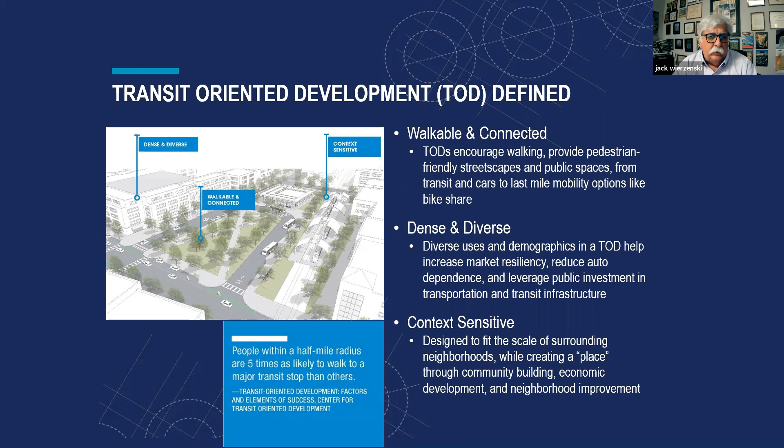Next slide. The thing that was done at the same time as this TOD guidelines update, and what's held up the TOD guidelines update, was also an update of the TOD policy. That had been done last in 2015. We had a lot of new issues and ideas pop up, and our board asked to update that. So what we did is midway through the process of updating the guidelines, we updated the TOD policy.

One of the things we really wrestled with, important to all of our cities, was that as we went through the update we realized all the cities have different goals and policies, and how do we incorporate that into an overall TOD policy representing the 13 cities. We've addressed this, and part of what we found, even talking with some of our board members, is a lack of understanding of what the cities are responsible for versus what DART is responsible for. Even in the public, there's a lot of thought that DART is just like a city, that we've got the same powers, that we can go in and change parking requirements and land uses, which is about as far from the truth as possible. DART does not even have economic development tools.

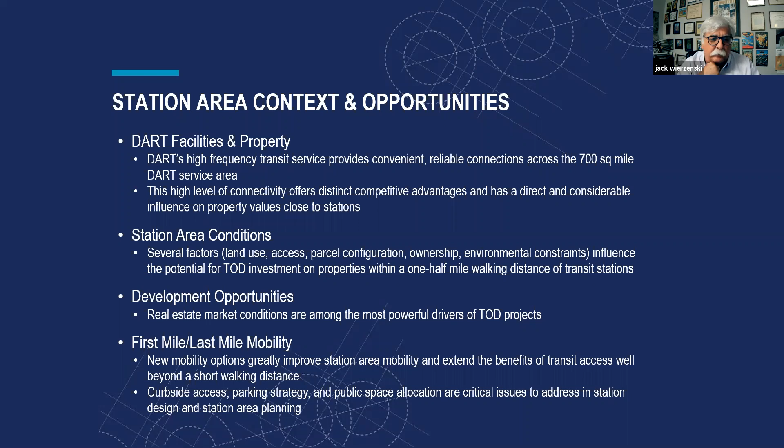So what we did is develop typologies for each of the station areas, just to give you an idea. I know some cities have done plans around their stations and developed their own typologies - the City of Dallas has a set of typologies they developed. This is what we looked at, working with our consultants, on a broad typology of all the station areas. I'll go through these quickly, as it's all in the guidelines. We've identified on a map all the variations of the typologies and where they're located on the system map.

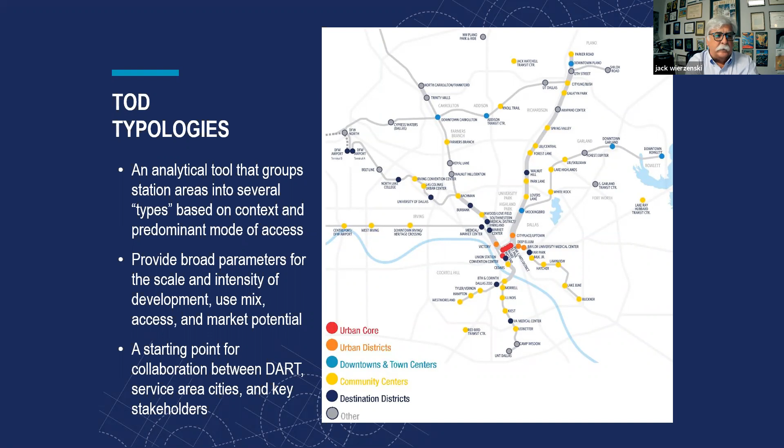And beginning with urban core, which is basically the downtown, the dense environment, urban districts.

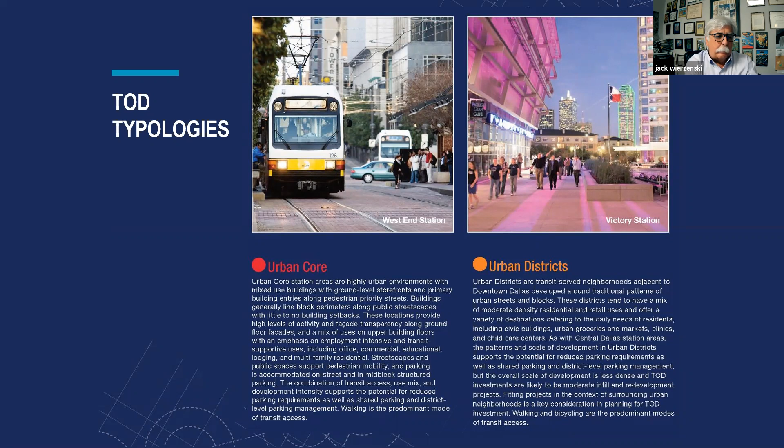The downtown and town centers. I think if there's one area that we've really seen the benefits of transit-oriented development in the suburban environment, it's in those small downtowns and town centers. The Rowlett, Garland, Plano, Farmers Branch, which we'll be hearing from here in a little bit from Tina, and Carrollton really see the impact of these station areas, particularly in those downtowns.

And then another typology, community centers.

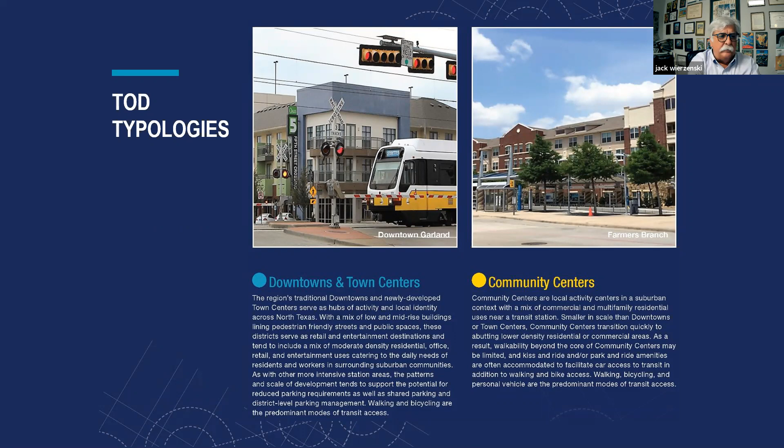Destinations such as the Victory area, maybe convention center, places like that. And then sort of the always famous other, our catch-all for some of the station areas. We have some residential that really will be nothing but local residential station areas, and so we keep that within the other.

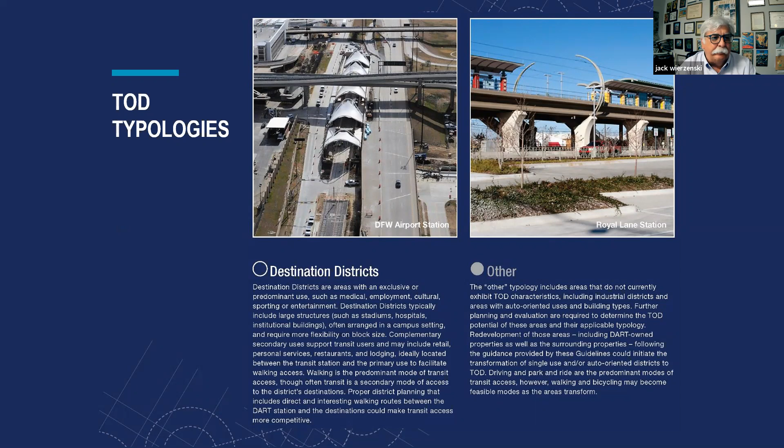So with that, what we follow into is looking at sort of the typical design. And again, nothing in these guidelines is meant to be prescriptive, this is the way you have to do it. These are just examples, sort of case studies on good ideas. If you just want to take one or two ideas from this, that's fine. But really, it's how to incorporate all these elements into creating a unique TOD environment around each of the station areas.

Looking at development patterns, again, street and pathway networks, how to integrate walking and bicycling into an environment that, from all intents and purposes, is usually heavily automobile oriented, and how to shift that.

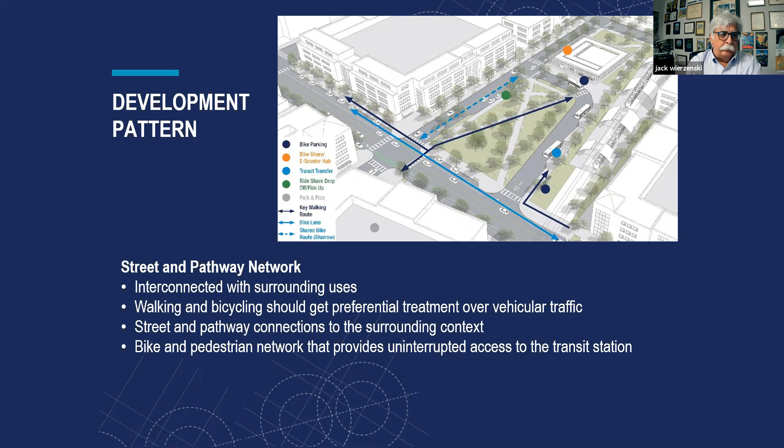Parking, the always interesting area of TOD is parking. How much is enough and how much is too much? We've referenced the COG study that we all partnered on a couple of years ago.

That's referenced here in the guidelines, but really what we've looked at in parking utilization is generally DART parking. We park about 45% of all the spaces we have, and this was pre-COVID. A lot less now, but we're planning now to start building back up again. But nonetheless, we are not using our property efficiently when it comes to surface parking areas. So we're working with our member cities on how to develop some of that, if not all the parking lots, and incorporate what parking is needed into shared parking or into parking garages and minimize surface parking.

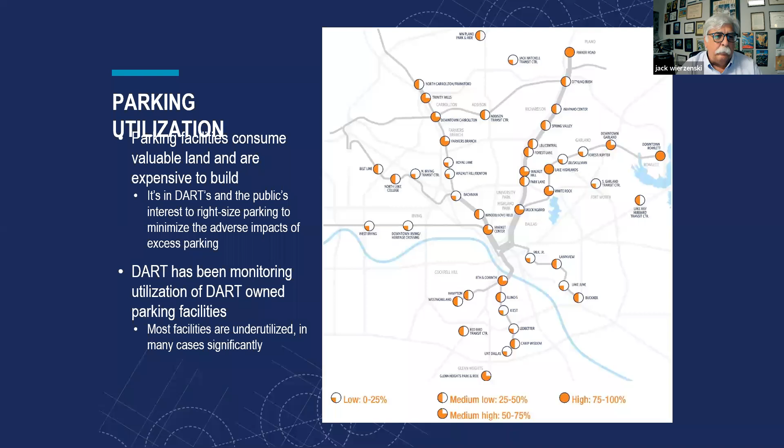So just a couple of bullets on parking, and there's a lot more to this in the guidelines. But what we really identified, which is I don't think anything new to everybody in this group, is that we're overbuilding our parking, even around TODs, which one of the points of a TOD is to be able to reduce parking. And what we're finding, and what the COG study has pointed out, is we're still overbuilding parking, and even around TODs, they're parking beyond what their parking requirements are.

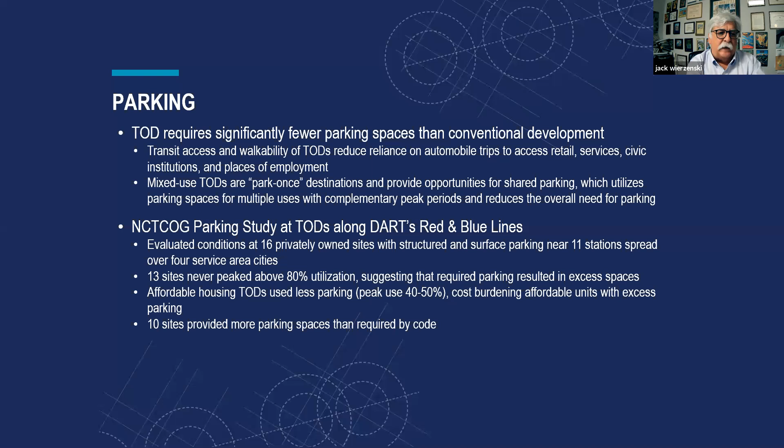So it's really something that has to be looked at. City of Dallas is going through this right now and re-examining their parking ordinance.

Looking at streets and public spaces, again, you'll see this is a common theme throughout the guidelines, and also ride sharing services, kiss and ride. What used to be kiss and ride is being converted into other uses, such as, we've got a couple of stations with Zipcar, and using some of the new technology that is being developed and how to take advantage of that.

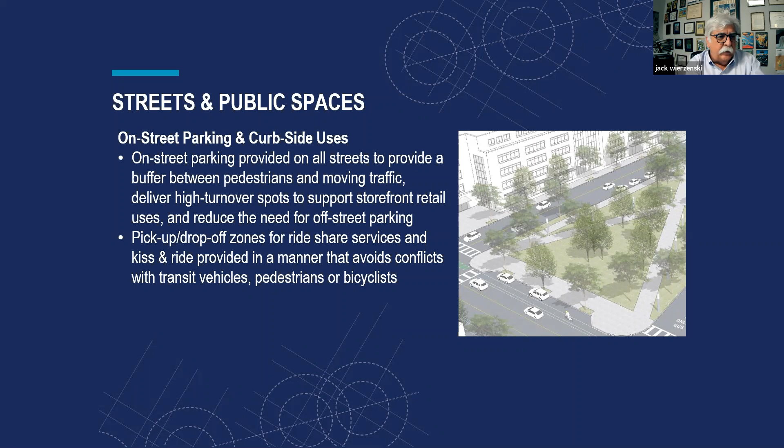Public spaces, which is always important. These are really, particularly with a TOD, the opportunity to leverage public spaces, gathering places, walkable places is always an advantage, particularly where you've got a lot of public land involved.

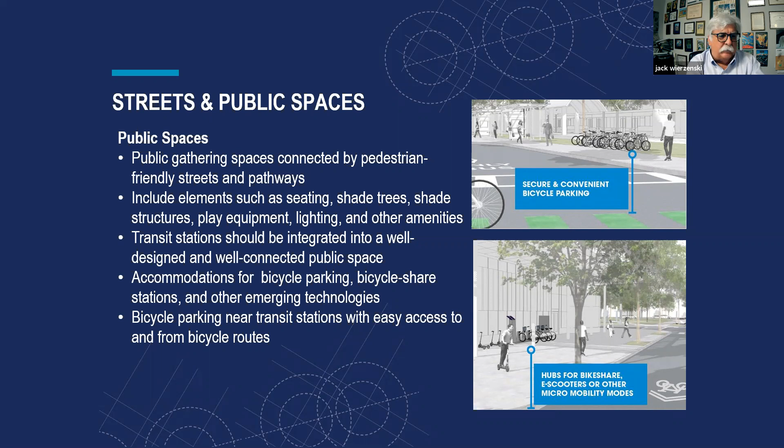And then site and building design. How do we include the buildings, incorporate buildings and integrate them around the station areas around these public spaces, but be close up, close by, and moving parking garages further away, not closer to. And so that's one of the things that we point out here.

One thing we haven't done is gotten into sort of what is the correct density, as if there was one. We leave that to the cities. Again, that's the city's role to develop the land use requirements and policies. What we're trying to just point out in the guidelines here are sort of best practices and things that need to be addressed.

Lastly, and this was really difficult to deal with, because what we're finding is every city is addressing this in their own particular way, depending on what the goals of the city are amongst all their many other goals, and how that fits into transit-oriented development. There's no real one size fits all for this.

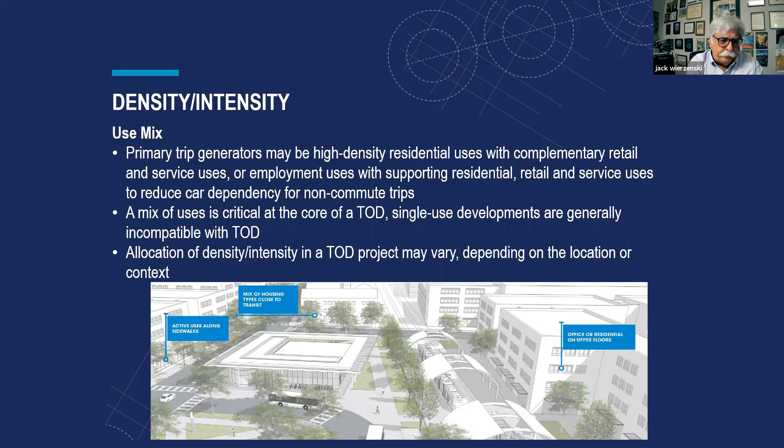So with this opportunity that Travis and Sean gave me, I wanted to put out there that we have these guidelines available. They're educational, a really good tool to have in your toolbox when you work with your elected officials, when they ask what this TOD stuff is. There's still a lot of people out there who aren't aware of what TOD is, or have misinterpretations of it. So with that, I'd be glad to answer any questions.

Thank you, Jack, really appreciate that. It's really interesting. If we have maybe a minute, if there's any questions for Jack.

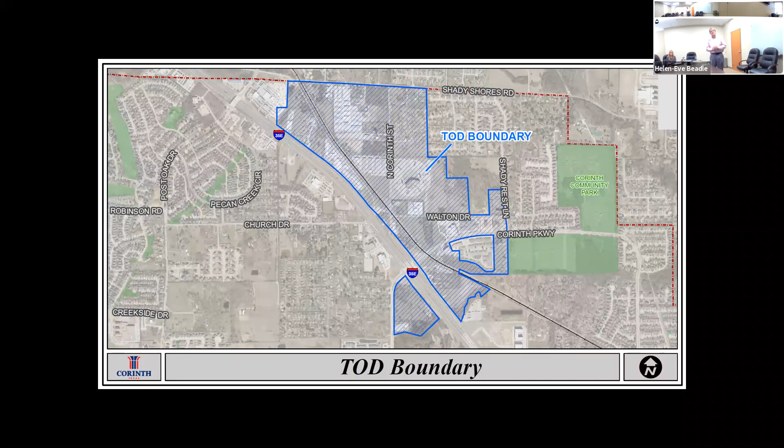This is a map of the area. We actually had this done by Catalyst with Paris Rutherford, who was able to lay out a vision of what we wanted to see, and he did that quite well. The idea came out of a strategic plan we did with the community about two years ago, so this has been a priority for the city council over the past two years.

As we're trying to assemble this, you get a sense of the area we're focusing on. Most of this is vacant currently, so there's very little redevelopment work involved. But a lot of it is centered around making NCTC a larger campus so they can have expansion opportunities with the TOD, and a lot more student engagement at the location, shuffling students from Denton to Corinth and down to Lewisville. So we'd be part of that overall mix. Next slide.

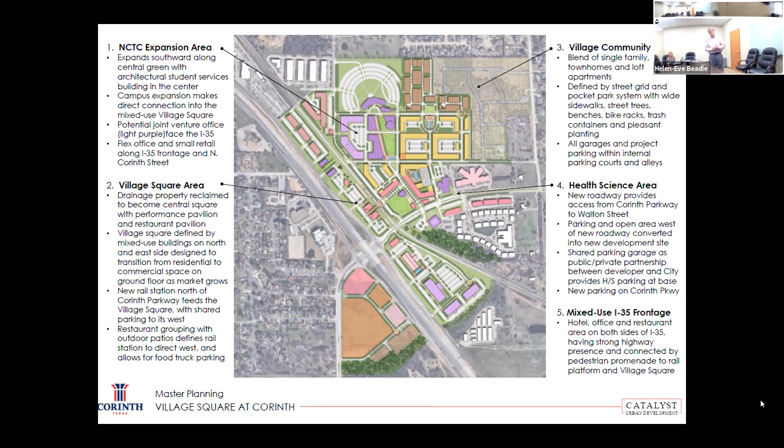This is an aerial view looking back into the area. City Hall is to the right, and NCTC's up in the top left corner. A lot of the work we're looking at doing is centered around a park that we're making as the primary public feature within this. You can see the proposed rail stop along the tracks.

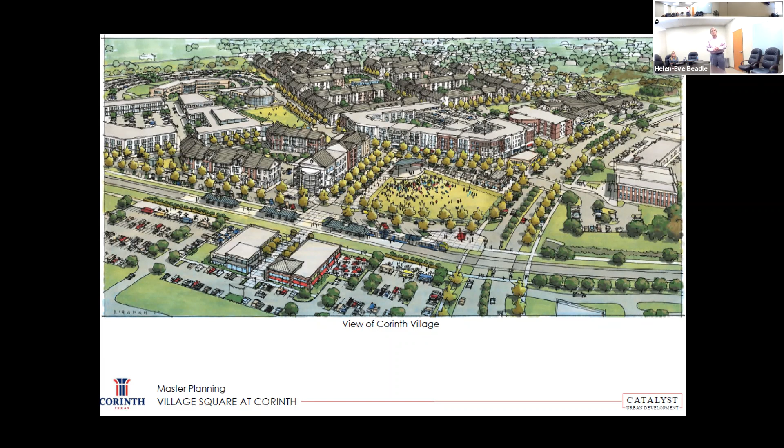This is a view if you're standing back near the pavilion looking into City Hall. These features were really important in helping us sell the vision and talk about that within the community.

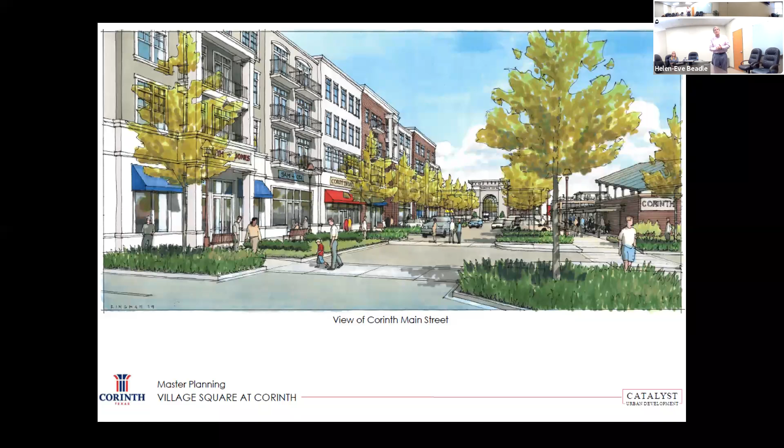This is the same drawing again, focused in the area between City Hall and the NCTC campus. We've assembled all of this land at this point. We're working with mixed use development to do a lot of the private development work. The park area on Corinth Parkway, our council has approved a master plan for, and we're moving forward with construction documents. The street alignments at North Corinth Street, what we call Agora Way, and Main Street, which bound the park and take us from Corinth Parkway to Walton, are under design now. The council has awarded a contract for that, and we're also dealing with the drainage within those areas.

Most importantly, we have land acquired on both sides of the rail stop. One of the redevelopment components is just on the north side of Walton. We're working with the business to relocate them to another location in Corinth so NCTC can expand south all the way to Walton. Just a little bit east of NCTC, we're working with them to acquire some land, and we'll be doing some single family and multifamily development up in that area. It's all consistent with the larger plan you saw a moment ago.

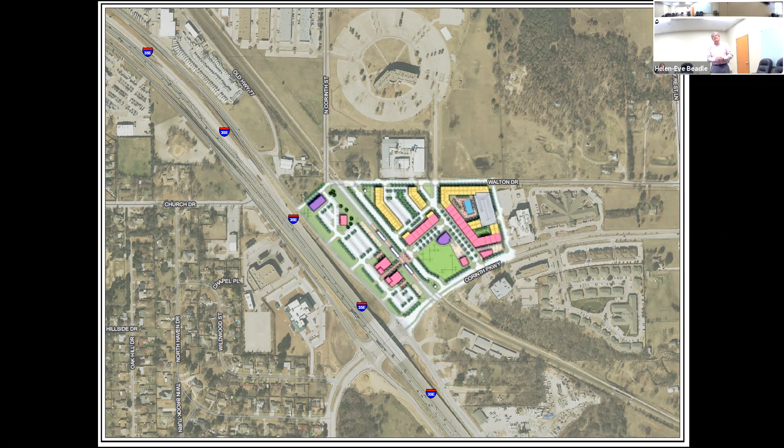This is a drawing for the rail stop. We worked with DCTA and LAN engineering to look at the feasibility to make sure this would work, and it does, it works quite well. This is where we have it laid out. The way we've been working with the park feature, we're designing it back into the rail stop so you can pick up some of the architectural features there. I think that will enhance the quality of the stop and the involvement with the public in that area.

The one thing we found in the study is we had rail crossings at Corinth Parkway and also a double crossing at Walton and North Corinth Street. Those crossings were actually too close to permit the use of a rail stop. So what we're working on now is closing the two crossings at Walton and North Corinth Street so we can move that north.

This is a picture of the park. You can see it's bounded on all four corners with streets. City Hall is just to the south of it, and you can see where the future railroad station would be, just to the west of that. You begin to see how visually all of that would tie together in the next slide.

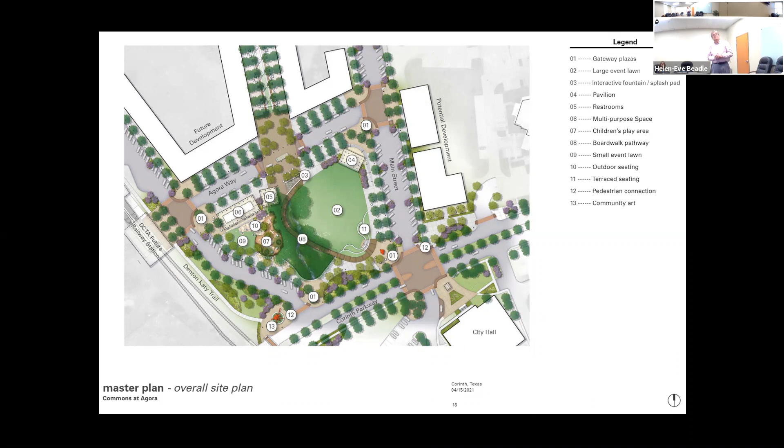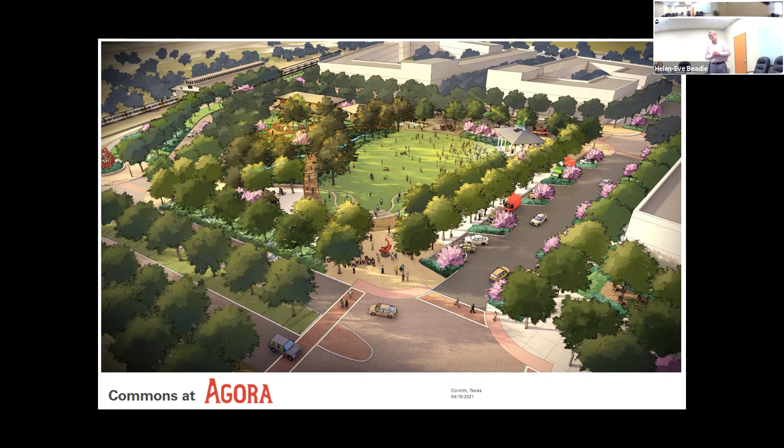This is an area, if you're standing on top of City Hall, looking back into the park. We've got some good tree areas, and we'll have a pavilion in there for entertainment. That'll be important for NCTC, but also for community development. The playground would be a place for that type of public use.

And this is the crossing reference that I was making, where we are closing the crossing at North Corinth Street and Walton and rerouting North Corinth Street. But that will also require building a crossing a little further north, which will become the primary access point into the North Central Texas campus.

In that way, I think we're really creating some great benefits for them. We're creating an environment that works quite well for the community, and then doing the development around that. We appreciated some of Jack's comments and picked up some notes from that, but followed the practices that have been going on in Denton County.

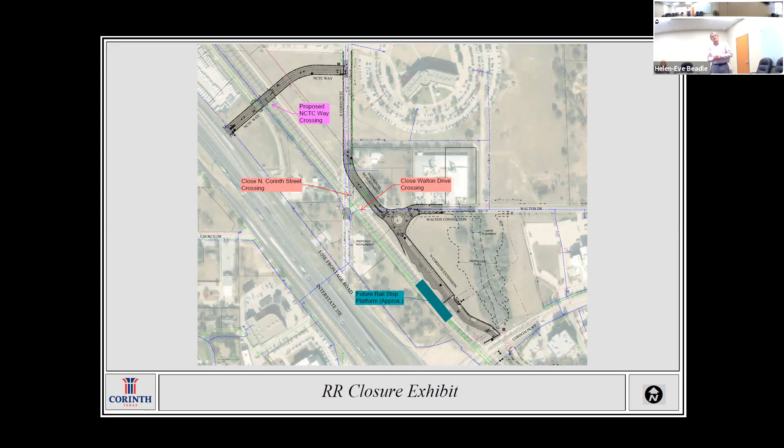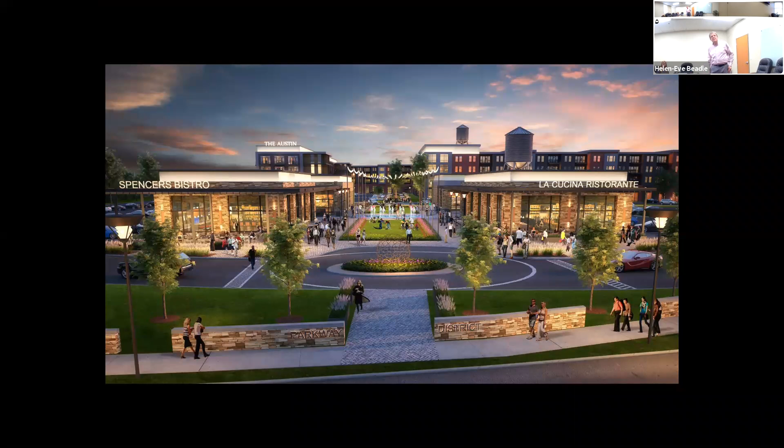I think there's one more, yeah, that's the last slide. So this is, we're working with Realty Capital, who are doing a mixed use development just to the west side. That's starting to generate some value within our TOD area and tax increment area, which generates cash to make this work. I think the most important thing we've done at this point is assemble the property that we need, and the council has been quite willing to do that.

And then we're putting in the public infrastructure so we can attract private investment. We're doing that concurrently while working with DCTA to secure a stop. With that, I'd be glad to answer any questions, though I suppose we could do that a little later in the program. Thank you.

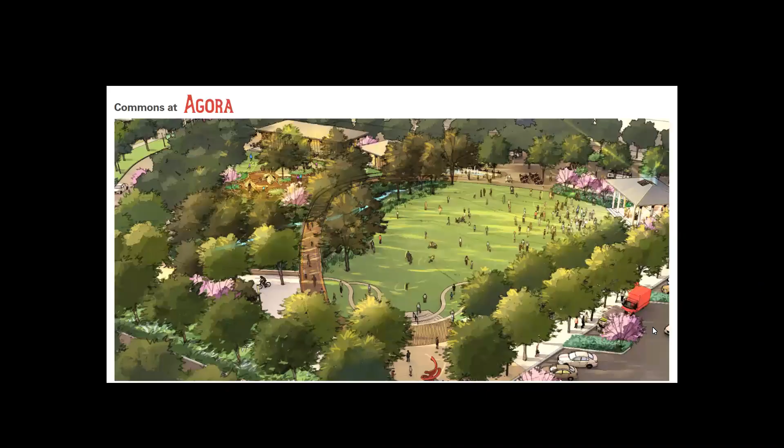Okay, just going to talk a little bit about infill development and transportation, just a few slides here. NCTCOG actually has a policy in our mobility plan, Mobility 2045, for transportation infrastructure that supports infill. That policy is to support mixed use, infill, and transit-oriented developments that utilize system capacity, reduce vehicle miles of travel, and improve air quality through improved mobility and access management.

We thought it would be helpful to introduce a definition of infill for purposes of this discussion. Broadly speaking, infill development is the process of developing vacant or underused parcels within already developed surrounding urban areas. It can occur in several varieties and scales.

You can have parcels that were previously undeveloped and are developing for the first time, parcels that are redeveloped usually at a higher intensity such as smaller sites in existing downtowns, and sites all the way up to much larger former developments, such as shopping mall sites or areas that have had brownfield remediation. Or types we might think about less commonly, like existing developed parcels that are more filled in, such as commercial buildings being added to an existing shopping center or accessory dwelling units added to single family home sites. So they're not even necessarily new sites, just filling in existing ones.

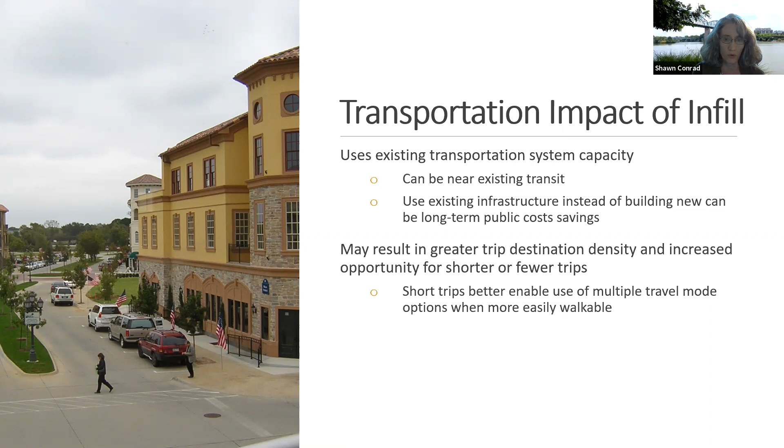In North Texas, infill occurs at a variety of scales, from small lots to big developments. There's no real limit to where that can occur, but it can meet transportation objectives of optimizing the use of existing system capacity, increasing destination density, and increasing the opportunity for non-motorized travel.

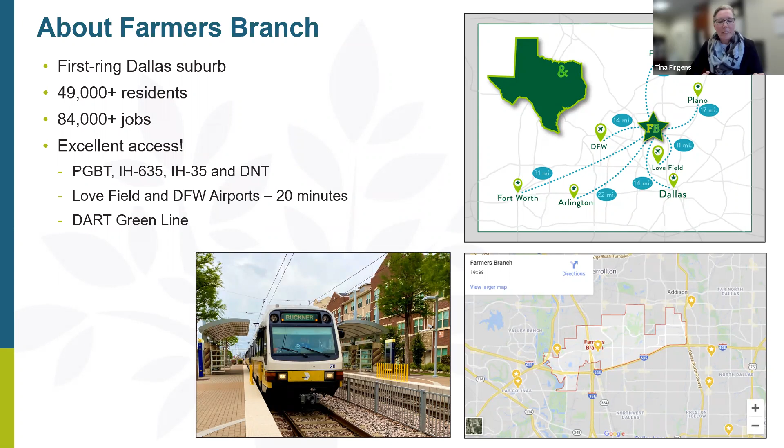Next slide. So nearly 20 years ago, we established a vision for our station area in July of 2002. Our goal was to have a dense urban village focused on pedestrian and transit-oriented development principles. We were interested in having increased densities of development, looking forward to maximizing development opportunities and helping property owners be able to do that. We were also very much interested in increasing property values for our community as well.

We wanted to have that improved pedestrian experience, really converting our streets into something more than they are today, having a sustainable mix of land uses that could be complementary and support each other, but also provide for some needs within our community, not to mention having those quality open spaces as well. We were also interested in how we maximize access to a variety of different transportation methods.

Obviously at that time, the first and foremost priority was the DART light rail station, but also looking over the last 20 years, the work we've done from a regional standpoint with our hike and bike trail system as well. You'll find these first few slides, I'm going to go through kind of quickly just to help set the framework, but I'd like to really focus on the project.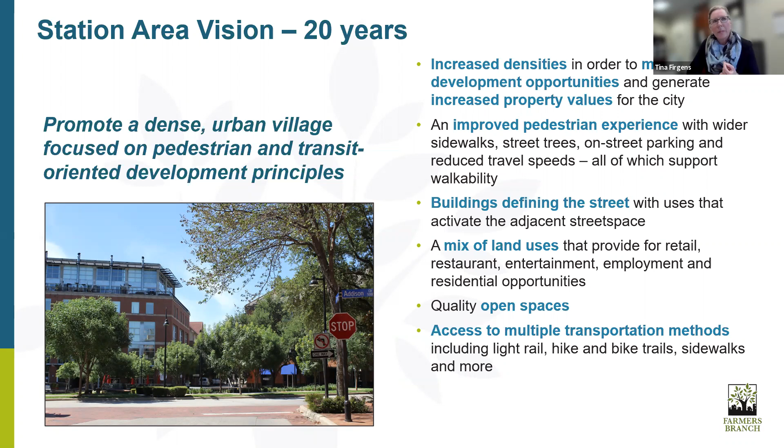The first one being we established our station area code for the area back in 2005. It is truly a form-based zoning code. I'd like to think we were cutting edge at the time when we put that in place, because we were one of the few cities in the area that had a true version of a form-based code. The other thing we were doing around that same time is we were beginning land assemblage of properties.

If you've been in the DFW area for a while, you might remember the former Word of Faith property that sat right on Stemmons Freeway. That's now where our present-day Dallas Star Center is located. We knew having the land assemblage was key to potentially entering public-private partnerships and helping developers build within our community. The Star Center is a great example of that, and so is some of the existing development with Western Securities today.

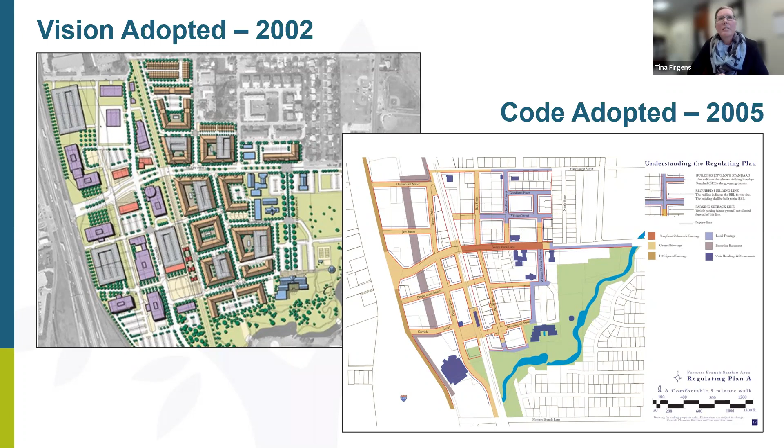Soon after we adopted that station area code, the economic downturn happened in 2008 and 2009, like many experienced. I think that had us, as well as other communities, looking at their long-range plans to see if they needed to make modifications. For us, it meant unfortunately having to modify our vision slightly for the station area.

So in 2012, we acknowledged that single-story development could potentially have a role in our station area along I-35. As a planner, that pains me to say, but you have to take into consideration the context and time period we were working within. We also acknowledged that surface parking could potentially have a role, and we allowed for some single-family homes just west of City Hall due to developer interest.

These modifications to our vision were the result of a market study completed around that time to determine what we could truly support in the area to help jumpstart our station area. But overall, one of the overarching philosophies is that our interest was still strong in having buildings define the street as illustrated in this plan, while improving the pedestrian experience, the mix of land uses, and the like. That really helps provide for our station area code today.

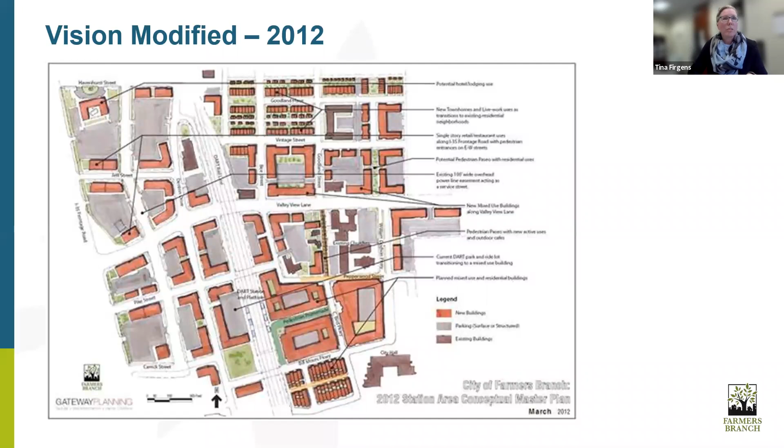I'd like to think our station area code is for the most part still fairly intact from when we started in 2005, because we're trying to facilitate that lively mix of uses that are complementary with each other, having that urban form of development.

In 2012, as I said, we watered down our code, if you will, to allow for single-story development, recognizing that might be necessary. We had minimum building heights of 4 stories and lowered that down to 1 to 3, depending on location. We at least preserved the taller building heights closer to the station area.

One area where we felt exposed on our form-based zoning code is that we did not establish any minimum densities for residential uses. So last year we went ahead and established that for multifamily and single-family attached development, because we felt we were really exposed from that standpoint. But overall, our station area code is consistent with the vision we established early on, back in 2002.

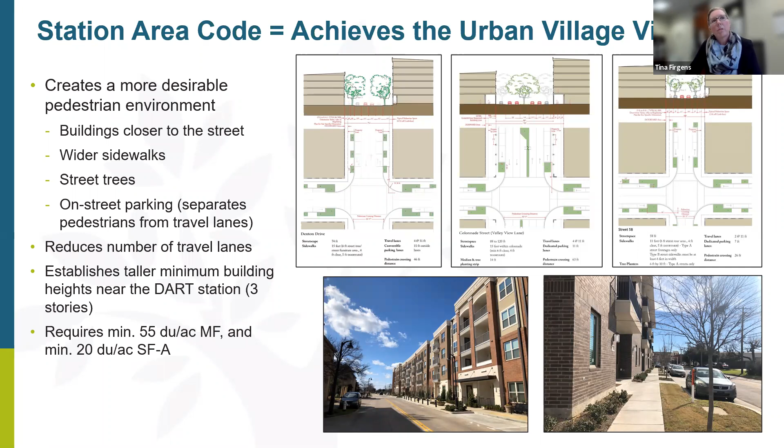With the images I just shared, you can really see our station area code is beginning to achieve our urban village vision. It has provided the regulatory framework that has facilitated these projects being constructed. More importantly, one of the key things of the code is it reduces the number of travel lanes within the station area, which helps provide the framework as we've moved forward with future projects.

Lastly, in terms of the visioning effort, back in February 2020 we went back to our city council to get reaffirmation from them: do we stay the course and continue working toward developing that dense urban village, continuing those initial objectives of increased development densities, maximizing development opportunities, having that mix of uses and all the characteristics that facilitate our urban village. The great thing is they said yes, to stay the course. That's really provided the foundation for future projects for our community moving forward, as well as some of the projects we're working on today.

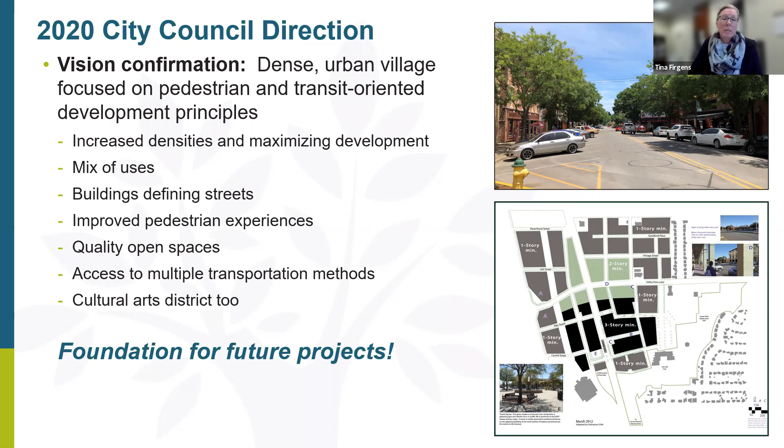The first project I'd like to share that's significant for our community is Valley View Lane being reimagined. Some folks might call it a road diet, but we have folks here at the city who take issue with that term, so I'd like to think we're reimagining the street for its future. Valley View Lane is a major 6-lane divided arterial roadway that traverses our community, intersects with I-35, and is located immediately north of our DART station, if you've ever been to Farmers Branch.

The council's reaffirmation of the vision really allowed us to move forward with this project so we can improve walkability along a key street in our community. It's also allowing us to repurpose outer lanes for on-street parking, provide wider sidewalks, add street trees, and really reimagine this street much more than what it is today. This project would not be feasible if not for the North Central Texas Council of Governments providing funding assistance, combined with our motivated city council seeing this project come to fruition.

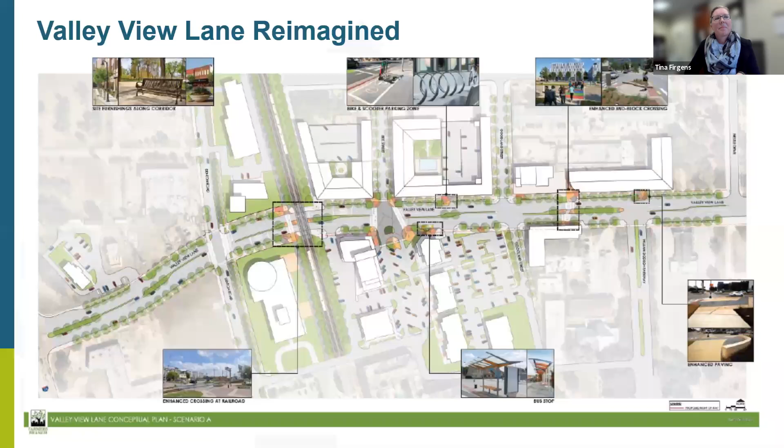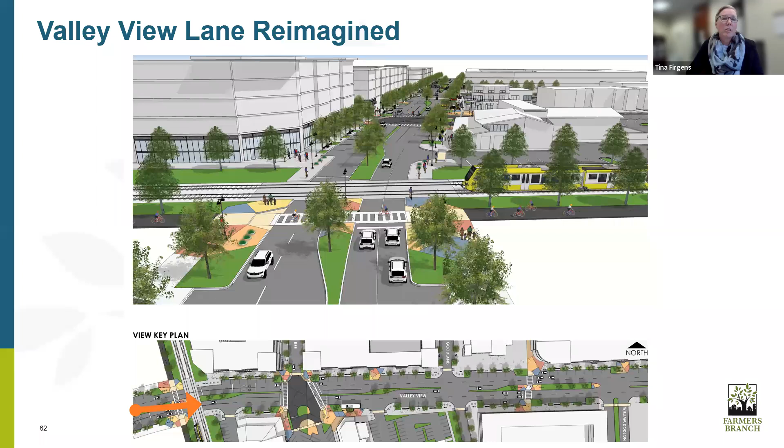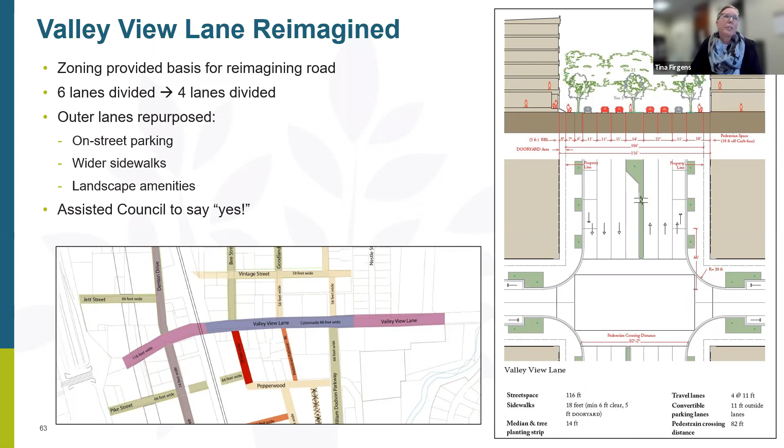Another project that's significant for our community is our hike and bike trail network, in particular our West Side Trail. This trail system is on the western portion of our community, west of I-35, and extends all the way to our western boundary where the super connector for President George Bush Turnpike comes into play. The trail system will connect from the Campion Trail in Irving on the far west side of our city limits, and eventually connect to our DART station.

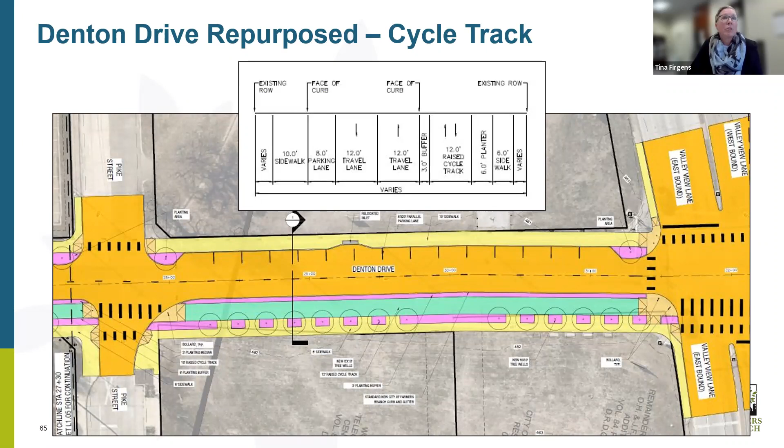Our sustainability and public health team is working hard on getting trail improvements built within our community. One of the projects they're working on is what I call Denton Drive Repurposed, where we're basically repurposing the outermost northbound lane of Denton Drive as a cycle track. Next slide, please.

These cycle track improvements will take the current 4-lane undivided roadway down to basically 3 lanes for automotive traffic, with the outermost northbound lane converted to the cycle track. This cycle track system is really important because it will connect eventually to the city of Dallas's future cycle track, which they are working on bringing up to our southern city limit line.

As I mentioned earlier, it connects to part of our West Side Trail and the Campion Trail. North of our station area, we anticipate having a shared use trail coming off of that cycle track, extending north to our northern city limit line, eventually connecting with the city of Carrollton when they bring their future hike and bike trail system south along Denton Drive. Again, this is another example where the zoning in place provided the basis for allowing us to drop the lane on Denton Drive, and really gave the council the ability to say yes on this project as well.

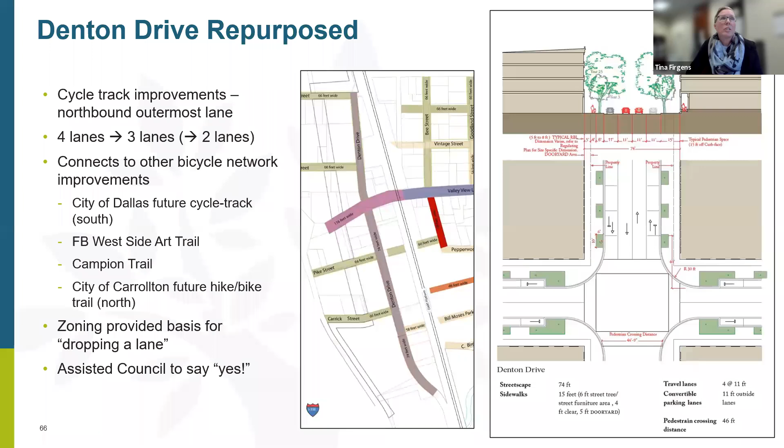Next slide. Another project we've been working on is the I-35 corridor, which we call the I-35 Betterment. The phase 2 widening of I-35 is getting ready to begin from 635 on our southern city limits all the way up to the Denton County line. In 2009, the decision was made to widen the highway to the west, which has significant implications for properties on the west side of our highway.

Valwood Parkway and Valley View Lane are two intersections that intersect with I-35 and are significant for our community because they serve as the gateway entrances into Farmers Branch. We knew it was important to work with TxDOT on improving the appearance of the highway infrastructure. If you've driven I-35 through Farmers Branch, you'll realize it's not the most glamorous looking infrastructure, so we needed to work with them to utilize the betterments they are providing, as well as any additional betterments we may be interested in.

One of the important things we also recognized is that we had to address the intersection designs at Valwood Parkway and Valley View. We recognized we had one shot to get this right, because TxDOT will probably not touch this corridor again for another 30 years.

Hence why the mayor established his I-35 Betterments Task Force. This task force worked towards prioritizing the important items for the corridor. We all wanted to have all the overhead utility put underground, but we realized that was very cost prohibitive. We agreed we could be more impactful and have better opportunities for our community by focusing on those two intersections and how we can make them create better east-west connectivity within our community.

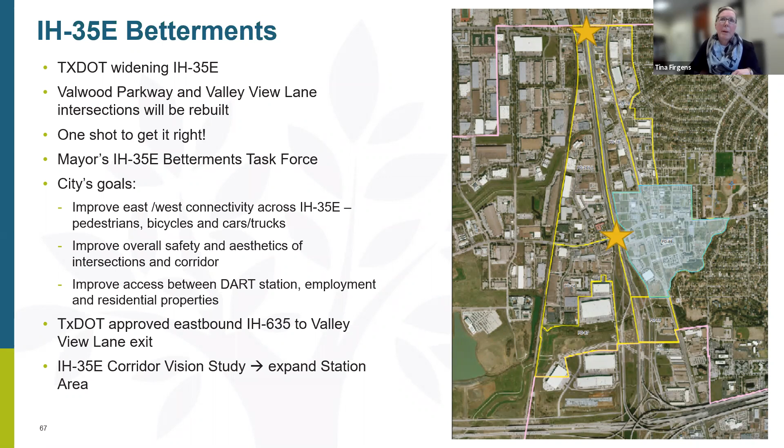And simultaneously with all of this, we were working on a land use visioning study for the I-35 corridor. Based upon the feedback we were receiving, the indications were that we would be expanding our station area to the west. Related to this and improving east-west connectivity, the public engagement results from the I-35 corridor study strongly supported improving east-west connectivity, both from a pedestrian and bicycle needs standpoint, in addition to facilitating expanding the station area westward.

Working with TxDOT, they said yes to this. We're very fortunate for that. They were also willing to allow us to narrow the travel lanes, because their original concepts were 12-foot wide lanes, and for Valwood Parkway we even had a 14-foot wide lane creeping in there. We realized we needed to shorten that distance pedestrians need to walk, so thank goodness TxDOT said yes and allowed us to get all of those lanes down to 11 feet in width.

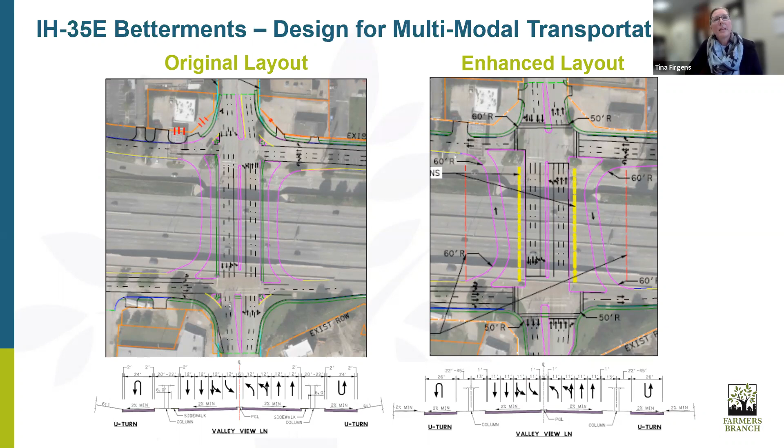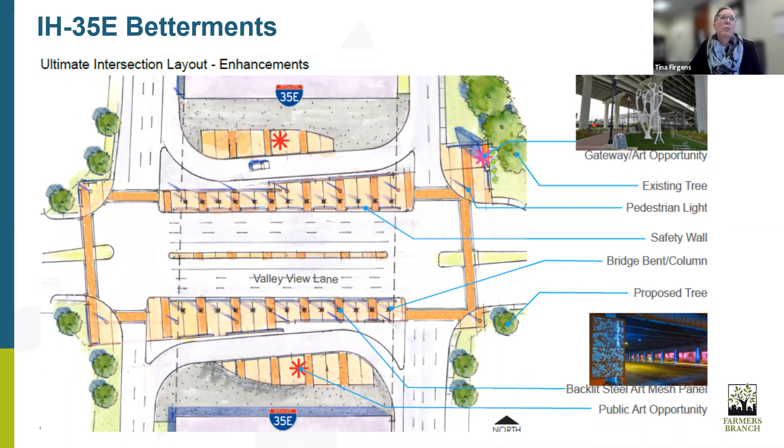This graphic just helps better illustrate what we're trying to achieve from an aesthetic standpoint. You can see with the U-turn lanes being skewed, it really provided opportunities for us to improve conditions for the pedestrians and bicyclists traversing under the I-35 bridge.

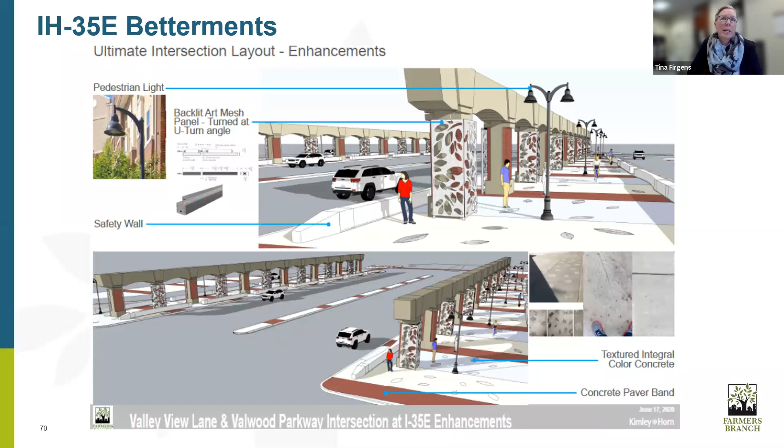Lastly, on betterments, thank you to TxDOT, because they were willing to allow us to push the envelope with our abutment wall graphics, and they will be paying for the costs associated with the abutment wall graphics at both intersections. So we're very grateful for that.

So as I mentioned earlier, one of the key objectives we've been working on all this time has been land assemblage. Right now we own 10 acres of land that is essentially, for the most part, all undeveloped. That has allowed us to enter into negotiations with an experienced pedestrian and transit-oriented developer to enter into a public-private partnership for our station area.

As I mentioned, we're currently in negotiations with them, and it's fun having these conversations. They're like, well, can we do multifamily? We're like, yep, the zoning's already in place, allows for it. Well, we'd like to put the streets on a diet and repurpose these outer lanes, can we do that? We're like, absolutely, yes, the code already allows for it.

The fact that we have our station area code already in place saves the developer time and money, because it's already entitled and they're not having to go through that process. Additionally, it allows us to have our expectations already established in working with them, so they at least know what the target is. We have some relief valves built into the code that would allow for some alterations or variations, if you will, but for the most part, it has the framework in place that allows us to say, this is what we want.

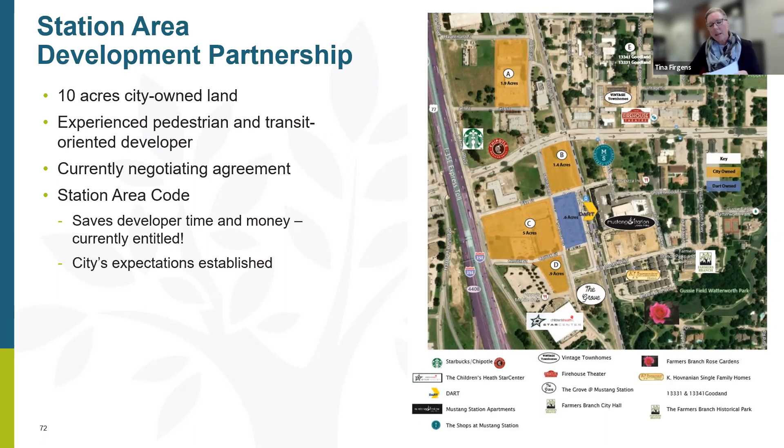Just briefly, I'll touch on this. As I mentioned earlier, we were working on an I-35 corridor vision study. This was more of a land use study, but also looking at transportation improvements, looking at how we better position the I-35 corridor for the next 20 years and create additional value within the corridor. We were very fortunate that our council was supportive of this project, and they adopted the corridor study in February of 2021.

Some key transit elements that come out of this study are, again, redesigning Valley View Lane as a new front door street within the area. This particularly pertains to Valley View Lane west of I-35, given the work already underway with design for Valley View Lane east of I-35. But other elements of the study from a transit standpoint are focused on designing for walkability, improving the sidewalks, implementing the bicycle connections, focusing on that last mile connectivity.

And then also we've been working with COG on their Irving to Frisco passenger rail, which is also a 20-year plan, if you will. We provided for increased densities so that in the event that rail line eventually has passenger commuter rail happening on it, we've positioned our station area to be able to support that rail station in that location as well.

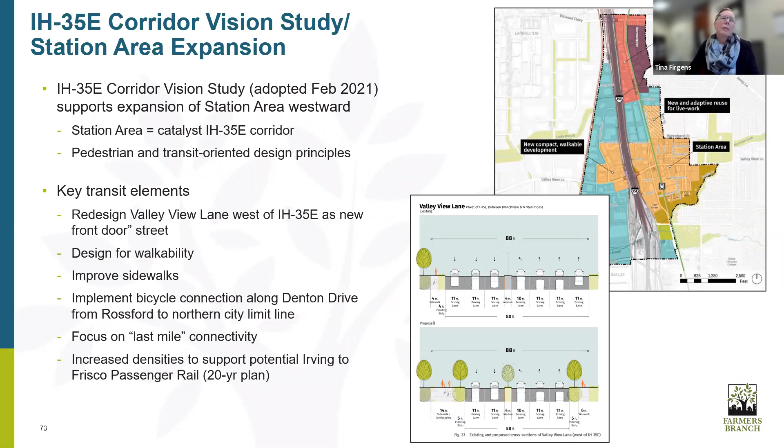Next slide. So one of the things the team asked us to address was lessons learned related to our project. I feel like we have the traditional planning story, right? You establish a vision, then develop your implementation plan, and execute it to achieve results. In our case, we established a vision that allows us to tell the story, and I think that's truly something that can be applied in other communities.

If you determine what you want, you may not have the funding in place just yet to execute all the implementation items, but it at least allows you to tell your story to developers when they come knocking, as well as the property owners who own land within your community. Developers are going to be more interested in pursuing projects that are supported by the city, right? Because they're not wanting to have an uphill battle, they want to be lock, stock, and barrel with city staff.

But if you do not plan your cities, then as many of you are probably aware, the developers will plan your city for you. So in our case, we felt it was really important to have that vision in place, and it allowed us to tell our story. We've been able to work on implementing our vision, and I would tell you, use the tools you have available and be proactive.

In our case, we established the zoning back in 2005. We were active in our land assemblage. That has provided for some of the existing multifamily development that exists today, as shown in this picture here, and the partnerships we've done with Western Securities, same with the buildings that are now in place in the restaurant park.

We also put a TIF district in place around the time that we established the zoning code, because we knew that was a tool available to help fund some of the public infrastructure improvements we'd want to do.

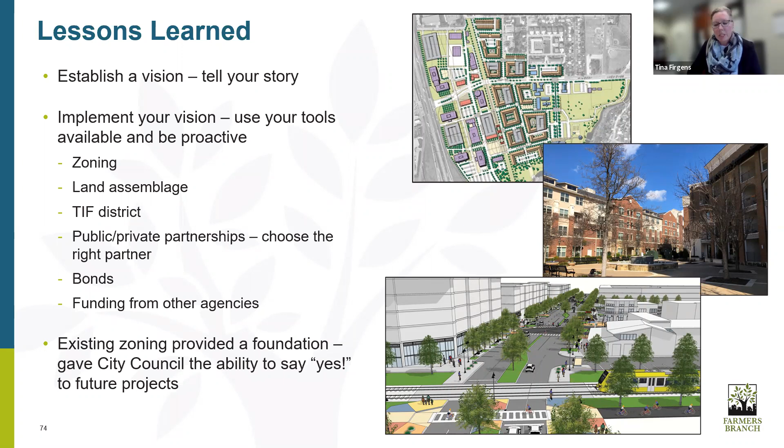Speaking of our elected and appointed officials, when I think about the first time I worked in Farmers Branch putting the visioning and zoning code in place—I had about an 11-year gap working in other communities before coming back—I still feel like we're doing this to this day. Early on, we had to educate our elected and appointed officials to help them understand what we were trying to achieve, and we still continue to do that because, let's face it, you have turnover.

Especially if you have term limits like we do, council members and planning and zoning commission members are coming and going. So from time to time you have to remember to educate the new folks to help them understand the bigger picture. We've been very fortunate to have elected and appointed officials who really get it, and when we take the time to educate them, they have that aha moment and understand why we're doing what we're doing.

I would also say find your project champions. Right now we're very blessed with the council we have, because they get it and understand what we're trying to achieve. The fact that we're doing the Valley View Lane and Denton Drive projects is very significant for a community of our size within the DFW area.

The other thing I'd tell you is stay committed to the vision—reaffirm, reevaluate, and retool when necessary. As I mentioned earlier, we had to do this coming out of the 08-09 economic recession. Update your code, because you'll find certain things work and others don't. We continue to make tweaks here and there, and we'll likely make a few more as we go along.

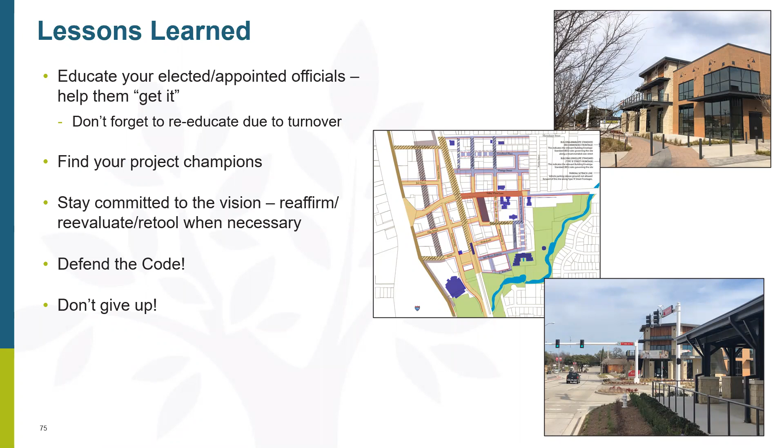All right, hello everyone. Thank you all for having us. We're just going to go right into it. We're going to talk about Lakeside DFW today, and it is in the town of Flower Mound. So next slide. We're already introduced, but we're going to tag team this presentation today. I'm JP Walton, assistant to the town manager and the interim economic development director. And we also have John Chapman, who is our long range planner. Next slide.

So to get our bearings together here, this is Lakeside DFW. It's on the southern portion of the town of Flower Mound. Town of Flower Mound is fairly wide, we actually go all the way out to I35W, but this is in our southern portion of town. To the west of Lakeside DFW is, of course, Grapevine Lake. It abuts up to the lake, so you can get those nice sunset views.

And then to the east of Lakeside DFW, we have our Lakeside business district. So you're going to have a lot of your warehouse distribution, flex space, and also office. In fact, Realty Capital, who developed Lakeside DFW, has also opened up Class A office space at the end of 2020, right there on FM 2499. So as you can tell on the left picture, Lakeside DFW is about halfway built out.

That northern half has been developed. The southern half, which is called Lakeside Village, is actually under construction right now. It's a very successful mixed-use development here in town, with a very vibrant community and a very successful business community so far.

We also wanted to point out that at the southern portion of the developed area, we have Lakeside Tower, which is a 16-story condo tower overlooking the lake. So we'll go on to the next slide and I will pass it off to John.

Thanks, JP. I'm John Chapman, the current long-range planner. So we're going to start off just with the foundation of what we all know is in planning, the zoning and our future land use designation.

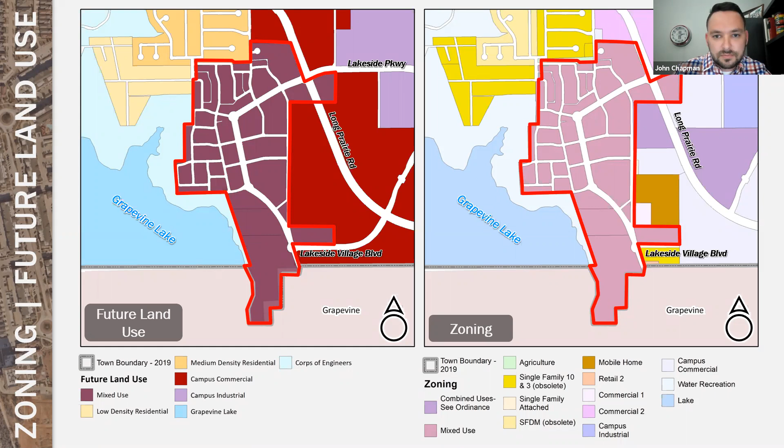As I was saying, it does require 2 of our 3 transition zonings, as well as the core mixed use district. Lakeside DFW did adopt all 3 of those, being a neighborhood transition, the major roadway transition, and the environmental transition. These each serve as a buffer between the regularly zoned areas between our town and our core mixed use district.

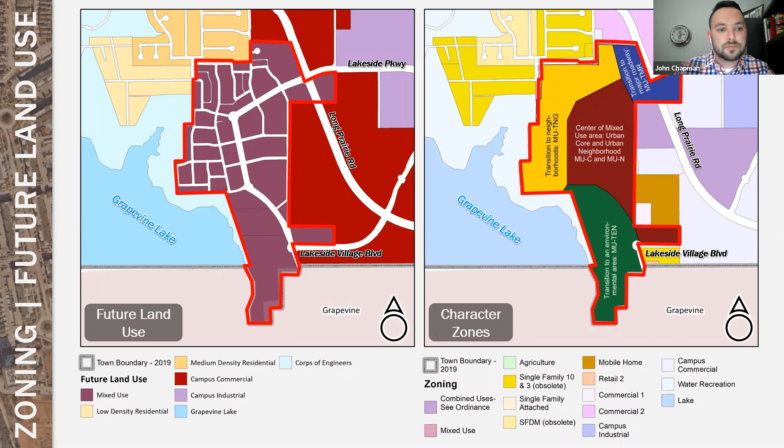Just a brief history. It's about 20 years or so in the making. It began back in 2000 with a 380 incentive agreement that required the town to install infrastructure in hopes to spur development. However, due to economic downfalls around that time period, it was shelved.

The project was shelved, but picked back up in around 2006 when our council formed a steering committee that was charged with developing the strategy to facilitate mixed use developments within the town. That steering committee then led to a mixed use ordinance that was adopted by council in 2008 with recommendations from the committee itself, as well as town staff.

4 years later, Lakeside DFW was re-entitled within the 149 acres. The zoning entitlements were approved, as well as the DA, the development agreement. 2 years following that, in 2014, another Chapter 380 incentive agreement was created to waive all town development fees and created a tax rebate program and required a deceleration lane, all of which we will chat about later.

Then in 2014 and 2015, there were 2 additional development agreement amendments, which addressed the development issues related to wastewater and amended amenity requirements. Between 2018 and 2020, phase 2 had been entitled with concept plans and development agreement amendments as well.

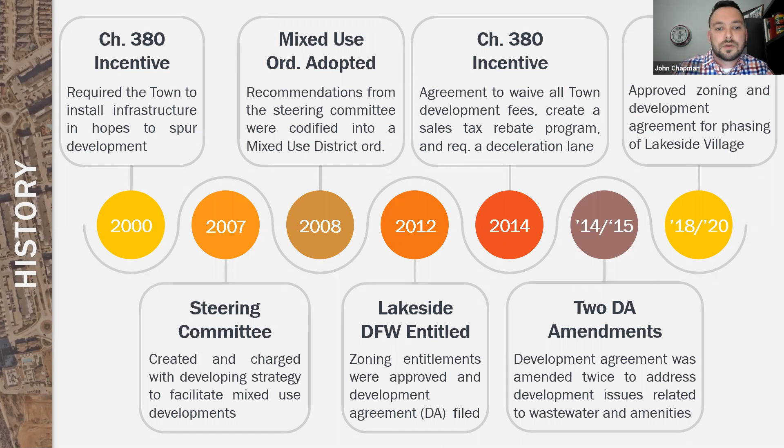The town then, through the updated mixed use or the creation of the mixed use zoning ordinance and master plan, recommended that on-street parking be included with the updated street section, as well as more narrow drive lanes and a slightly smaller planting strip, all in the efforts of encouraging more efficient parking.

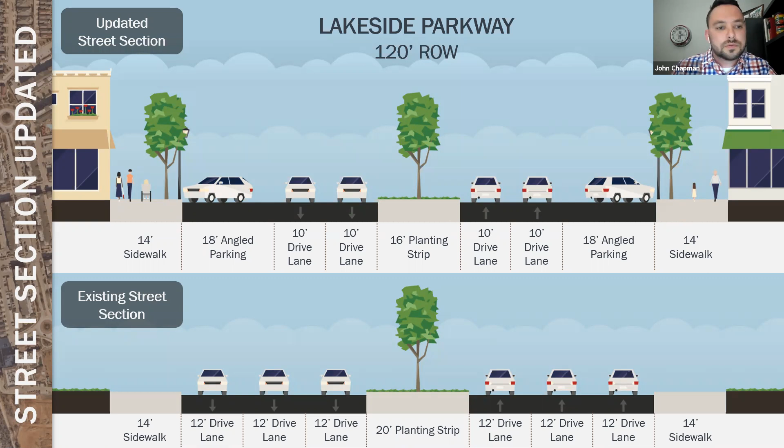This development does have a large trail system. The gray hashed line is our required 8-foot trail. It's just nearly 2.5 miles of pavement. It connects 17 public and entitled open spaces, which is great, and activates a lot of the area and provides residents abilities to get away from the high intensity uses within this development.

Along the boulevard, which was the Lakeside Parkway, we are required to have 14-foot sidewalks. Those sidewalks are provided for bicycle pedestrians, sidewalk amenities, all those sorts of things.

And then the trail system that runs between, it's going to be that first picture and the second picture. That trail system interconnects many of our multifamily buildings for easy access, and it leads to a looped path that's developed as part of the Long Prairie Park.

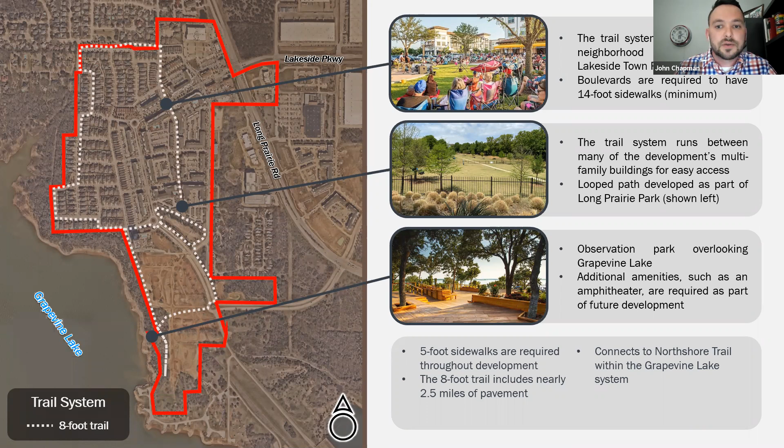And I'll pass it back over to JP.

All right, and I'll touch on some of the incentives and talk about development agreements that we've had at Lakeside DFW. So our Chapter 380 agreement really had three main parts. First off was a tax abatement, 50% tax abatement for 10 years.

Then we had an impact fee grant, which really is a cash grant equal to a specific amount or percent of impact fees paid. It was 100% cash grant for the first 2 years, 87.5% for years 3 and 4, and 75% years 5 through 10.

On our permit fees, we actually waived all permit fees for the first 2 years, reduced to 75% for years 3 and 4, and then reduced to 50% years 5 through 10.

And essentially that just tried to incentivize that area to develop quickly. As we all know, the sooner that area develops, the sooner the town can get some of the ad valorem tax from it.

And so when we do our incentive agreements, we actually go back and grade them, keep a scorecard. We just want to keep track. We do this annually, every single year. So for this particular incentive, every $1 the town spent, we actually receive $3.50 back in return. And this does not include sales tax, which of course the state of Texas doesn't allow us to release - that's confidential information. So it's much larger than that.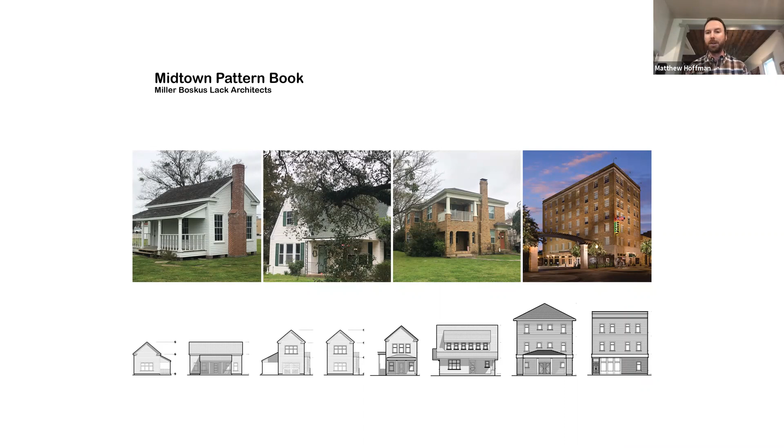And what came out of that is 4 flexible building types that we wanted to pre-approve. So we have, on the small end, a cottage, and on the larger end, a larger mixed-use walk-up building that can also be all residential. All of these are flexible. They're available in a number of different formats, because one of the questions we always get is, okay, you're only doing 4 building types, isn't everything just going to look the same?

So do 1, 2 slides forward. There we go. So what we ended up developing in the pattern book is this kind of architectural choose-your-own-adventure, where you can think of the basic building type, either a cottage or an apartment house or a walk-up building, as being like a chassis that we can then apply different architectural treatments to, different facades, different unit types, 1 or 2 bedrooms, even different configurations.

So a flex house can go back and forth between a single family house and a duplex. And the idea was to try to provide as much flexibility as we could within the program, but we know that there's going to be a need for more.

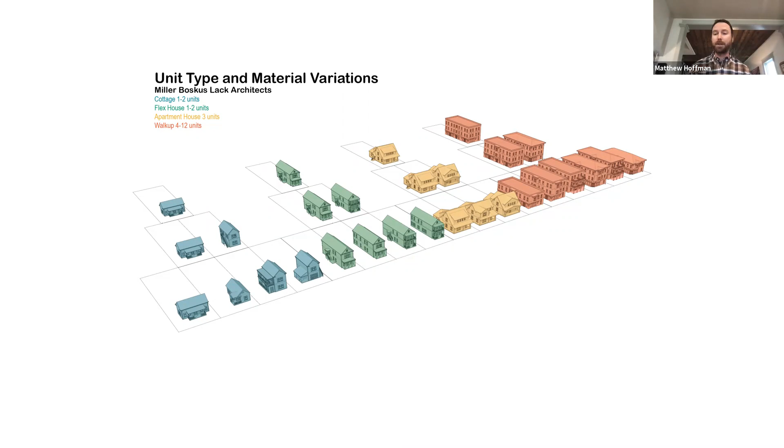Next slide. Part of the program was also to develop a set of guidelines for the city that would allow minor modifications that the city could approve administratively, which would still keep the building within qualifying territory for being pre-approved. Major modifications would simply kick the project out into the normal development review stream that every other project, since the beginning of zoning, has been able to go through. That's still available. Next slide.

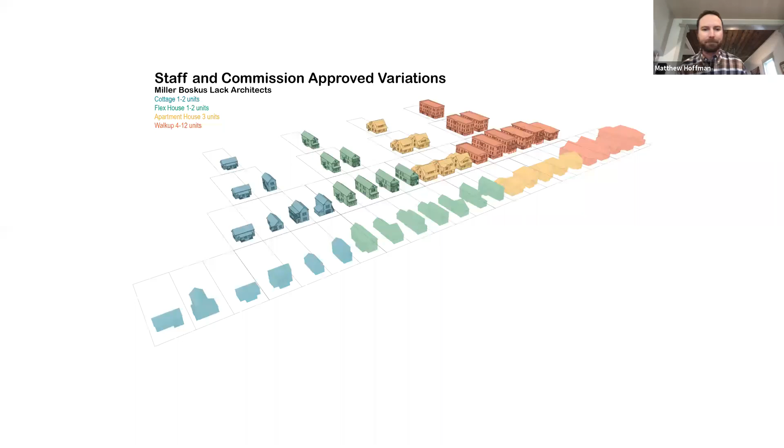Okay, so I spoke about incremental development, and I want to show a little bit how this could play out. This is a little diagram that we threw together. You can think of this as kind of a typical midtown neighborhood, or actually just a typical suburban neighborhood. You can see the suburban single family development model, large lot single family houses at about 3 units per acre, with this kind of commercial arterial that cuts through the middle of it with large swaths of surface parking out front.

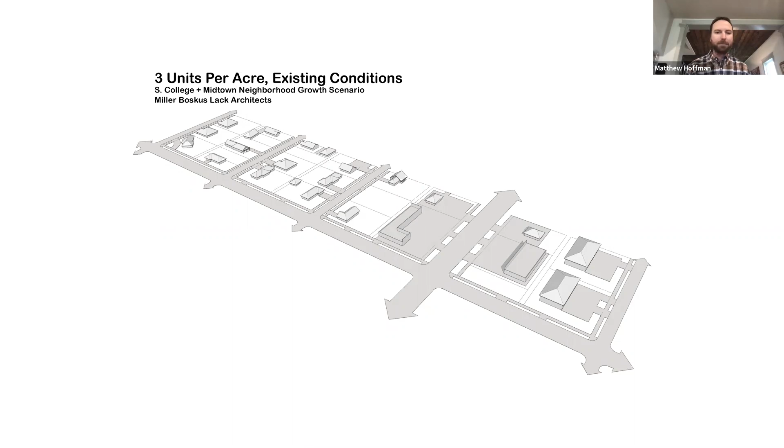Next slide. I spoke about, there are many aspects of this project. One was a pretty intense study that we did along this commercial arterial that went through the study area, and we ended up recommending several different catalytic projects along the corridor, where we actually worked with property owners and developers to suss out their vision, but also recommended some public improvements to the public right of way. So we see that as a near-term intervention that could help catalyze some of the other types of development that we want to see in the area.

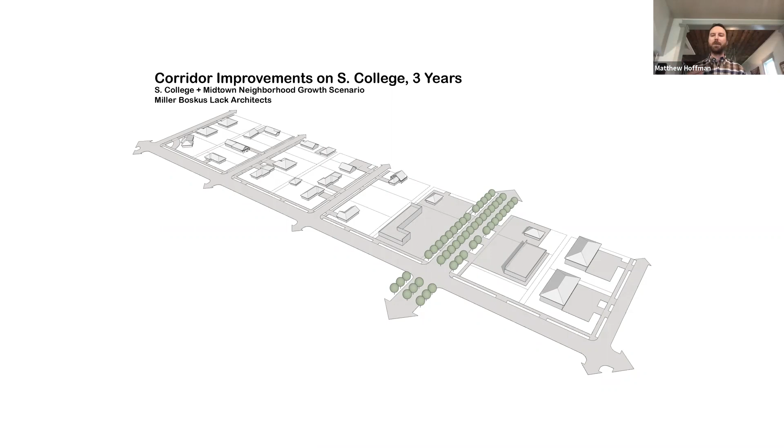Next slide. So this is kind of a 5-year vision, and what you're seeing is some of the little blue buildings. That's the cottage building type that we've pre-approved. That's an incredibly flexible building type, as they all are, really. The cottage is one that can either be put in the backyard as an accessory dwelling unit, put on a small parcel all on its own, or aggregated and used in a larger parcel to create like a bungalow court or a cottage court.

And as you can tell, just looking at the diagram, we're 5 years down the road and we've already doubled the density. And just by looking at those streets, you can tell we haven't torn anything down. All of them are going to be pretty familiar to what they were just a few years ago. And of course, that's a great way to keep from angering the neighbors.

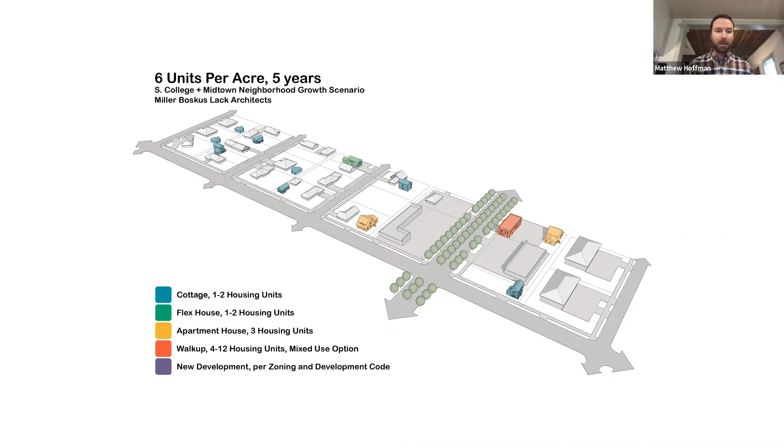Next slide. So another 5 years down the road, we've doubled the density again. Again, the streets are relatively familiar, and we're starting to see larger building types. We're starting to earn our way up to some of the larger building types, those 3-story mixed-use walk-ups that we've pre-approved along the corridor. On some of the larger parcels within the neighborhood, we're seeing some of the aggregated development typologies like the bungalow court. Next slide.

And then we have the climax condition here, 15 years down the road, where we've earned our way to one of those large scale developments. You see the purple large mixed use building on the corner—that's not something we'd need to pre-approve. That's something that would come along after those retailers have seen the natural development of rooftops needed to justify that kind of development. But the neighborhood is still quite familiar to what it used to be. That familiarity principle plays out all the way through, and here we find ourselves 15 years later at a transit-ready density of 18 units per acre.

So just to jump into the actual deliverable a little bit, this is an excerpt spread from the pattern book, which we were fortunate to be recognized for by the Congress for the New Urbanism at their awards ceremony last year.

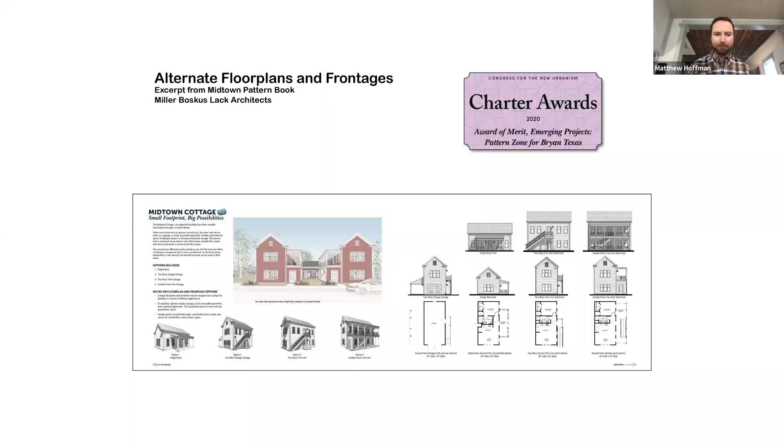Along with every building type, we did a series of lot diagrams and supplemental criteria based on typical lots within Midtown. And when I say typical, I mean it's a rectangle that complies with the general lot dimensions we saw through our study. Obviously if you've got a 3-sided lot with a creek running through it, this program may not work for you, but for the vast majority of lots in Midtown, we'll have a diagram that works.

You're seeing the one for the cottage all the way on the left. You can see how we've got a plan for small scale infill on a small lot. You could also put it, as I mentioned, behind an existing home as an accessory dwelling unit, or as you can see in the 2 diagrams on the right, in those small bungalow court formats.

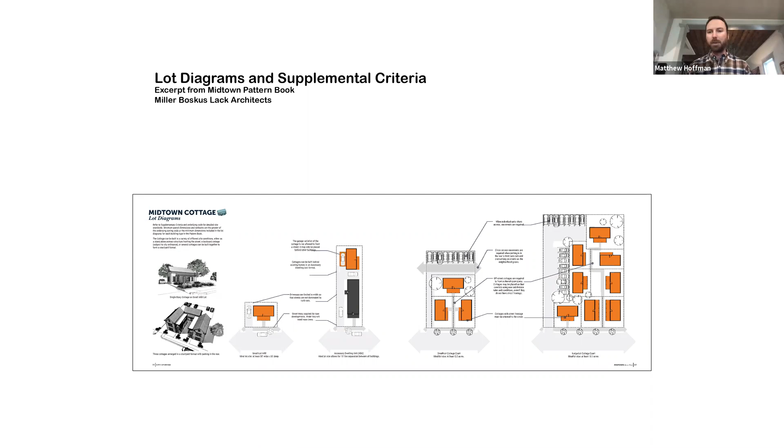We've developed this set of supplemental criteria, described both in the diagrams here and in an appendix that acts as a set of development standards. It deals with everything from the required number of parking spots to the required number of street trees, to the required width of drive aisles, and even cross access in areas where we didn't have alleys. It's a comprehensive document that's insular—it works all on its own. It's something people can opt into, and if they do, they can actually get a building permit in 7 to 10 days, along with a complete builder set to go ahead and build while they're at it.

Here's a sample of the different building types we created for the city of Bryan. The cottage we've been talking about is up at the top—you're looking at a cottage court arrangement with 3 different cottages, 1 and 2 story, mixed in. The second one down, with the shed dormer, is actually a triplex, which surprises some people, since it obviously looks like a single family house.

One of the real strengths of this program—we held several public meetings with hundreds of people attending, and we actually did 3D prints of all these building types so we could hand them out to people, let them turn them around, and ask questions.

We found that, empirically, if you ask someone, hey, what do you think about putting a triplex in your single family neighborhood, most people are going to say not only no, but heck no, get out of here. But if you hand them a model of a building that looks like that, a significant percentage are going to say, hey, actually that's pretty nice, that looks like a nice development. And there's, how many units did you say? There's 3 units. So people are really surprised by the ability of design to bridge some of these gaps we often see in these development conversations, where it's the big development against the big neighborhood.

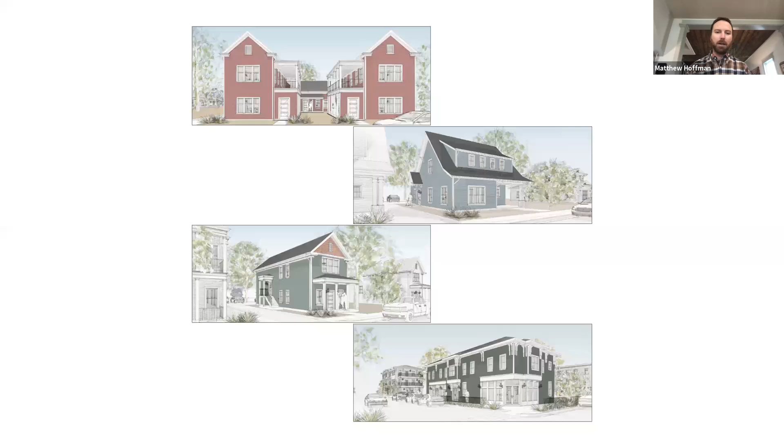You're seeing a 2-story mixed use walk-up there. That can also be a 3-story mixed use walk-up, or it can be a 2 or 3-story residential building. It can have 1 or 2 bedroom units in it. And we're able to do that with wood frame construction, conventional framing, no elevator needed, a single stair. So from a development perspective, it's a really attractive model. I wish Lindsay were here, she could speak to this, but I think that one's getting quite a bit of interest from the development community in Bryan.

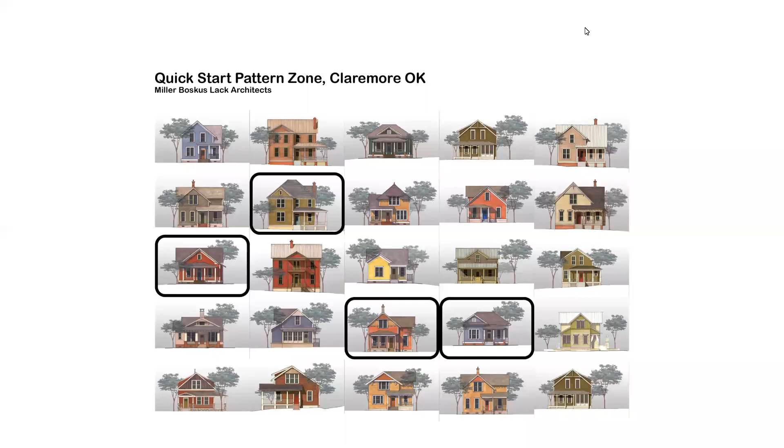Thanks, Sean. I'd encourage everyone with their time remaining to submit questions in the chat for our speakers, or feel free to unmute yourself and jump into the conversation. I know we have many expert planners and experienced folks from around our region on this call this afternoon, so we'd love to hear your questions from your experience with infill development in the region. But to start us off, I just wanted to ask, how important, in each of these projects and planning processes, was the economic rationale of seeing an economic benefit from either allowing small infill or larger infill? And have you seen any of that so far?

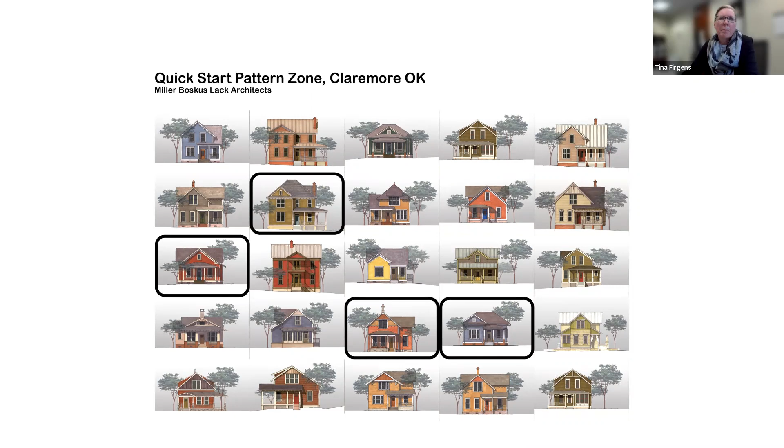Why don't we start with Tina? I think the economic rationale actually did factor into our decisions, because at the end of the day, we were interested in maximizing development opportunities and creating increased property value within our community. So there's obviously a definite economic value there, and that is of importance to us as we continue to move forward with the development partnerships that we're looking at entering into with respect to the 10 acres of land that we have right now. But as we continue conversations, I know Jack spoke earlier to, I think the statistic that he had was something like $16 billion worth of development near the transit stations within the DART network. We're a small component of that, right? So the economic development factor really did at least influence us in our decision making.

I guess I'll go on to say as well, here in Flower Mound, when you look at our property taxes, it's about 75% residential, 25% commercial. We've had a push to try to balance that out more. Guess you would define us as a bedroom community - a lot of people live here, may work somewhere else. I think office is something that we would really like, corporate office. I know that 2020 has definitely put a dent in that market, but we have seen office move out to some more of our suburban type communities. When you talk to folks who do want to bring office in, they need people, they also need a variety of housing types. They need more of these mixed use developments and more of denser areas. And so we definitely have seen Lakeside DFW as an example be kind of that first step into attracting more corporate office, which is what we're looking for.

Hey, this is Eric Wilhite. I just wanted to mention, I know back in the day when we were early on in North Richland Hills doing expanding hometown and such with the mixed use stuff, and especially the vertical mixed use, have you guys noticed it seems that developers have an easier time getting financing now? Because I know early on, as this stuff moved into this region, developers wanted to kind of do it, but they had a difficult time getting the financing because the banks and insurance companies and all the other people involved in that kind of aspect of it didn't understand it, and they had a hard time getting financing. So I think now it seems that the point of the spear is kind of past, and it's getting more creative on new ideologies with it, but the financing is probably not as difficult to get as it used to be.